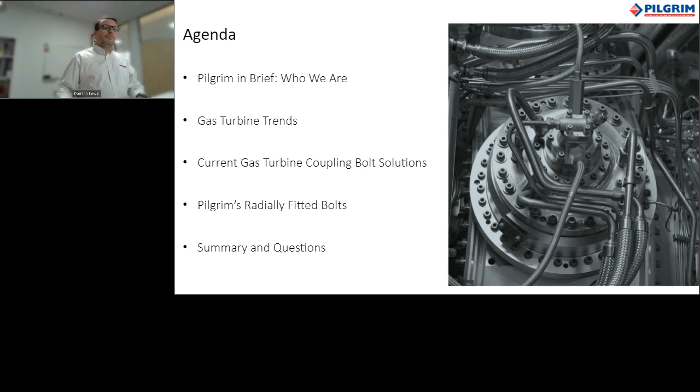So, who are Pilgrim International? I'll give you a brief insight into who we are. What do Pilgrim do? We are an engineering company with a vision to create a world of trouble-free connections, and we focus primarily on high-integrity joint fixings, whether that's static or rotating.

We have a number of technology platforms that support this: our boltings and positioning offer, which we'll talk about today, bolt tensioning systems, and hydraulic drive-up systems. We provide a number of services into the market, including training and on-site machining, and we also have a hydraulics pack offer to support the installation and use of the majority of our products.

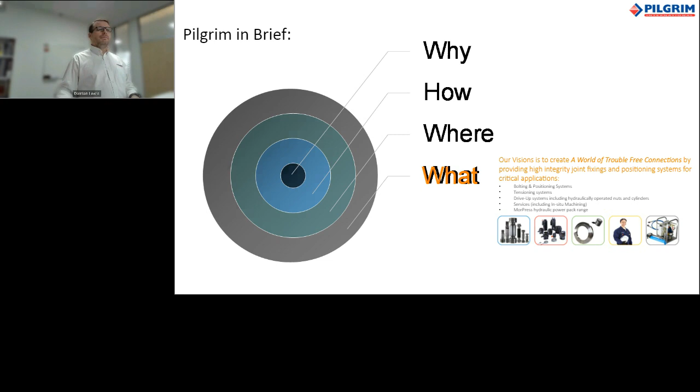We're a company based in the UK, with manufacturing in Sweden, and we sell to over 55 countries directly, over a large number of years. We also work through a number of agents and distributors, so we try to reach out to everybody in the marketplace.

How do we do it? We're a company with over 65 years in existence, and in that time we've gained a lot of experience through creating known friction into systems. We have strong experience of oil injection methods, and good knowledge of material expansion, which my colleague David will show you in the product we discuss later. We're also very experienced at working with high pressures, around about 2,300 bar, and we know how to seal mechanical systems using these high pressures. We couple that with a vast knowledge of key industries such as marine, or in this case, power generation, which we'll talk to you about today.

But why do we do it? We have a passion, and our passion is removing uncertainty for our clients. And what we mean by uncertainty is reducing unplanned costs. So we like to create systems and solutions that are predictable and reliable. And what that means is that it improves the operating income for our customers. And also, we like to try and improve the performance of our customers' assets as well.

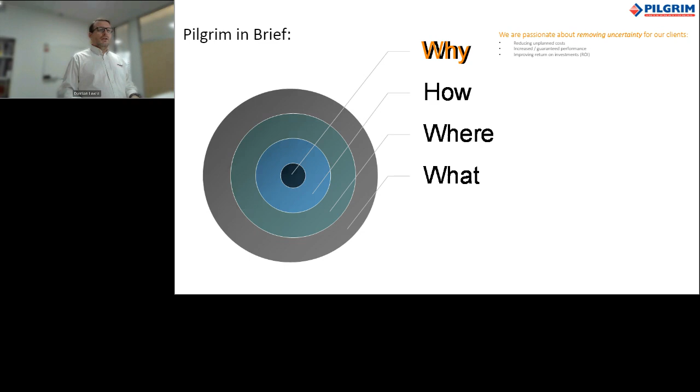So just want to highlight, here's some key customers or clients that we work with through different industries. And as you can see in the top section, we deal a lot with power generation, and whether that's the turbine OEM companies or whether that's the end users, the people who are actually using the equipment, we work with all areas of the business. And that really helps us gain a lot of knowledge and a lot of experience about how our product can positively impact our clients.

So now what I'd like to do, now that I've introduced Pilgrim, I'd like to just talk a little bit about how we see the trends in gas turbines. And if I start with the macro view, the larger picture on what's happening globally, what we can see is that there is a lot of focus on decarbonisation, and I don't think I need to go into too much detail about that. If you just watch the news, I think you can see there's a lot of that going on at the moment, and rightly so.

But what does that mean? We see that there's a lot of focus on transitioning from fossil fuels to renewable and reliable sources of power. What this means is that there is a transition away from coal generation. And I saw a phrase the other day that it will be ultimately outlawed. So through government activities, the use of coal will become less and less.

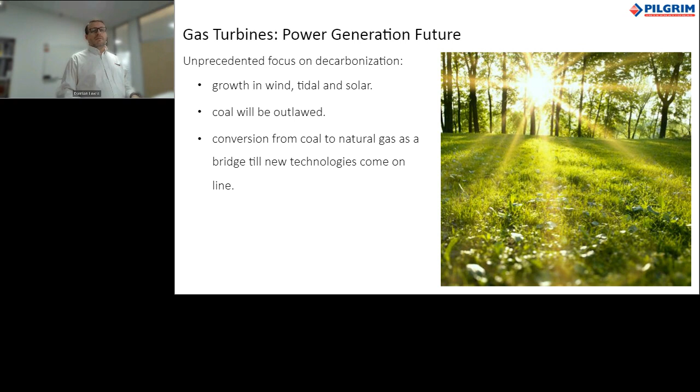So what that means is we see a lot of transition of power plants moving from coal and converting to combined cycle power plants, as an example, and the use of natural gas. And we see that will be a bridge until the new technologies that we're talking about, such as hydrogen, come on board.

And then we also see that there's a mixture of blending hydrogen and natural gases together. And that's a big activity for the turbine OEMs to come up with solutions on how to manage that transition of increasing the blend or the reliability on hydrogen and reducing the need for natural gas in the future.

And then we also observe that nuclear is making a comeback from the last 20 years of having some bad press. Now it's being reconsidered as a reliable source for energy again.

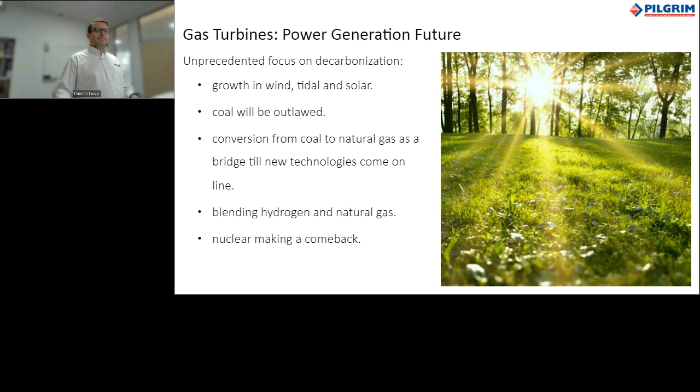So if we then look what that means specifically for the challenges of gas turbines, we see that the gas turbine business will maintain and increase over the next 10 years or so.

There are some aggressive targets for gas turbine development. So there's a lot of activity on how to improve. And where we see those are through efficiency improvements in the gas turbines, and I'll explain a little bit about that in some slides to come.

The compatibility with renewable energy sources and the pressure that will put on gas turbines is the ability to start up quickly and bridge the gaps where renewable energy sources can't meet. Maybe, for example, as a wind turbine, if there's no wind, we still need to have energy.

Obviously, a flavour of the month is CO2 emissions, the reduction of those to support the environmental impacts.

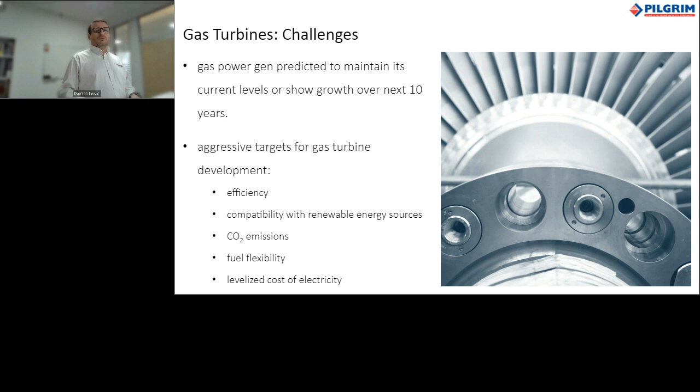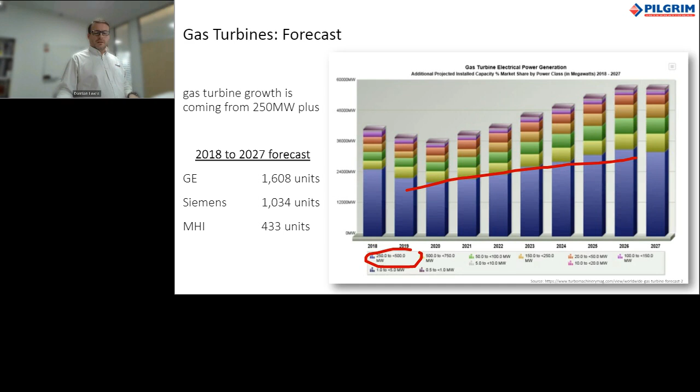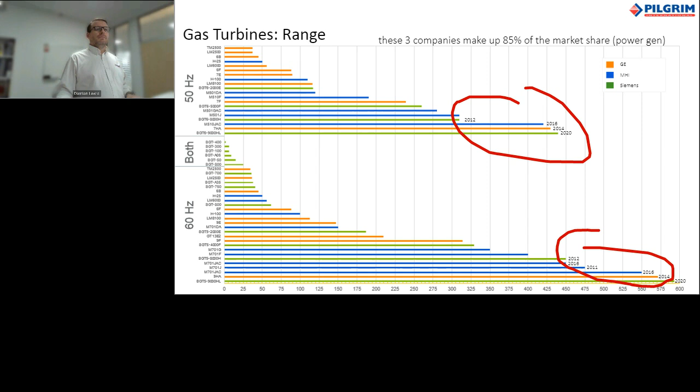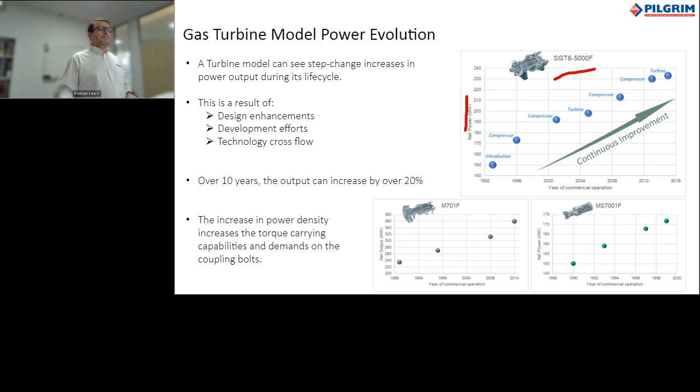So what I'd like to do now is just spend a few minutes to talk about the basics of coupling bolting. What is the basic activity of a coupling? Its functionality is basically to transmit torque. When you have a flanged coupling, you need to bolt it together. I'm going to explain two methods that we see in the marketplace that are quite common. You have friction-driven solutions, and basically they are a low-cost solution that are transmitting axial preload by clamping the two coupling halves together.

And through friction, that drives the torque through the system. The thing that we see here is that they create small transmissible torque. So they can only really be successfully used on smaller turbines.

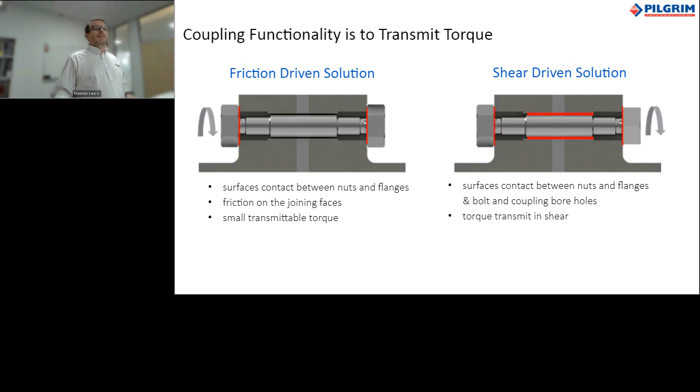What we then see is shear-driven solutions. The solution that we're showing you here is a combination of shear and friction, denoted by the red areas here. How that works is the torque transmission is actually transferred using contact area between the bolt and the couplings to drive the couplings, both through the diameter of the bolt connecting with the bore of the coupling, and also through the face of the nuts to the coupling as well, intentionally. Again, this seems like a really good solution. However, there's some issues that we can see, and I'll explain those as we go into the next slides.

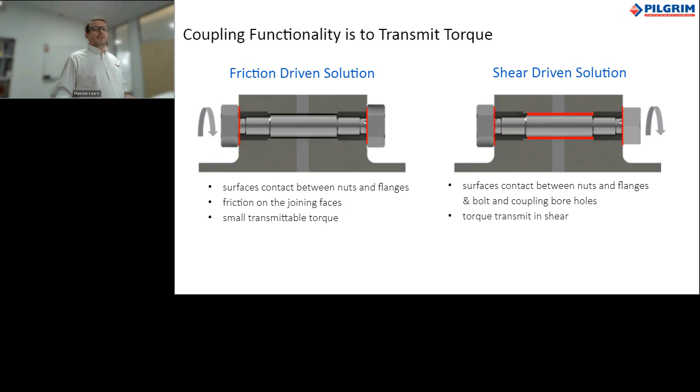So first of all, I'll talk a little bit about the friction solution. It's a low cost solution, and it's very common in the marketplace. The issue that we see is that it can create unplanned costs because the bolting solution can fail. What we mean by fail is that there can be stuck bolts. When the bolt is in situ and actually in operation, there can be some shock loads that are created, which means that there's some micro movements. Because there's clearance in the system, the bolt can get jarred and get stuck. With that comes some downsides of trying to remove the bolt and some additional costs. The other issue that we see is that each bolt in the coupling cannot be uniformly loaded. So there's some difference between each bolt.

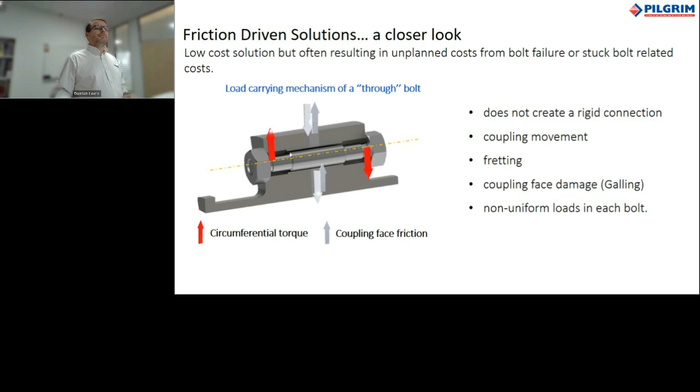If we then look at the shear solution, these are called fitted bolts, but in the main, they have some element of clearance to be able to assemble them into the hole, even if it's just a very small dimension. However, there is some clearance. And what we see as well is that when the bolt is actually tensioned, this also stretches the bolt. What that means is that the shank diameter of the bolt, which should be in contact with the coupling, can actually reduce in size slightly, creating an even bigger clearance between the coupling and the bolt itself. What that allows is for micro movements under dynamic loads, and then the bolt can actually angle itself and get stuck, creating a stuck bolt situation when trying to decouple. So we often see that there's a seized bolt situation with these solutions.

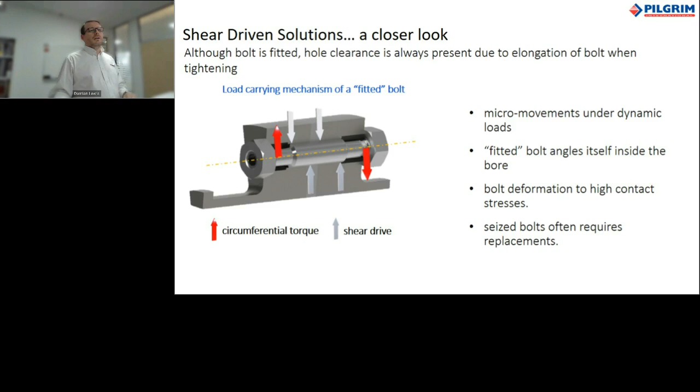So if that doesn't happen very often, is that really a problem? What we can see here from these pictures is that it can be quite catastrophic.

In the top left-hand corner, you can see a bore that has been damaged by micro movements, and the bore material has started to fleck away. In the second one, you can see some carburization where oil has got in and heated, and that's not very friendly towards the bolting solution and trying to remove the bolt. It actually sets like concrete.

When you're tensioning bolts or torquing bolts, you can see here that there's face damage on the third picture, creating damage on the coupling face. And if you do get an unfortunate situation where you have a bolt stuck, you can damage the bore trying to remove it. Here you can see some real clear damage to the bore diameter.

And if you do get stuck bolts, quite often you have to use methods, as you can see in pictures 5 and 6, where we're actually having to acetylene torch the bolt out to destroy it, to remove it. In the last picture, there is a specialist company that's been brought in to drill through the bolt to remove it. That means cost, but also replacement product as well, and all these have a major impact on safety. These are all activities that we don't want our operators to be doing when they're having to decouple.

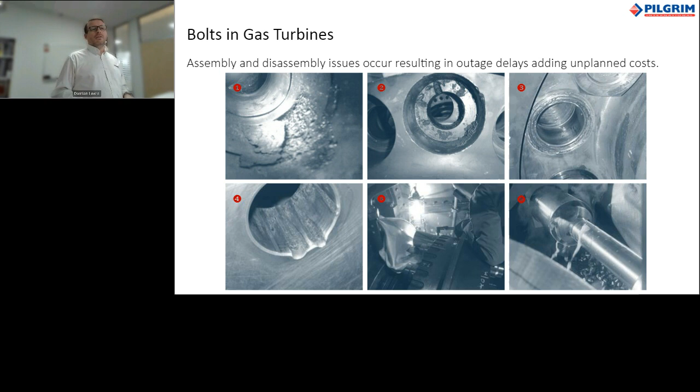So, as I said before, what if this happens infrequently? But in our experience of being in the power generation business for over 35 years, we don't see this as an irregular occurrence. We undertook a survey in 2020 and asked one very simple question to a user group of gas turbine users: how often do you experience seized coupling bolts when you're splitting a coupling during an outage? The feedback was quite alarming, but not surprising.

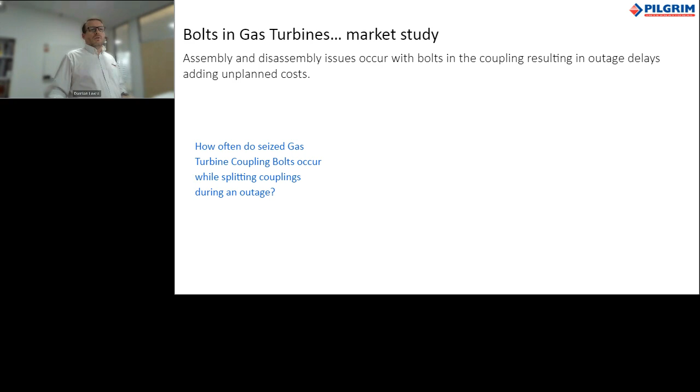We saw that 80% of people splitting couplings actually experienced some level of stuck bolt situation. And of that 80%, 37% experienced it very often. This is really why Pilgrim exists, because we want to solve this issue. We want a situation where our customers and clients don't experience stuck bolts, because we recognize some of the pain that this causes our customers.

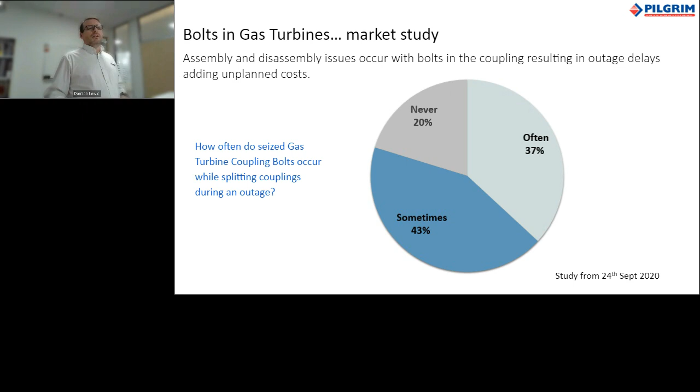So before we move on to a small quiz, I'd just like to give a conclusion on this and show you what we see as regular bolting solutions in the market today, or the types of bolting. I talked a little bit before about friction and shear driven solutions, and what we see is the classic torque tightened clearance bolt. To summarize, it transmits low frictional forces.

The coupling can create coupling damage, and this is very common. It doesn't retain its loads, or it's inaccurate, and we see that coupling slippage is quite common, especially when you hit some dynamic loads coming into the system.

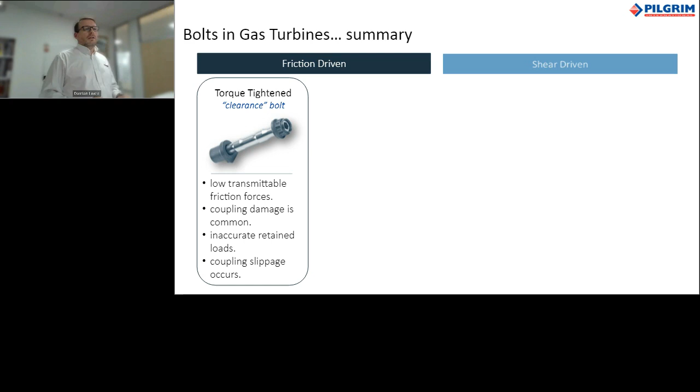So what we then see is that some companies have actually created a hydraulically driven friction bolt. And these need massive preloads. That means the solution is designed right to the end of the envelope of its operational ability, and it needs that to create the preloads.

But that comes with some risk, because you need quite a lot of safety equipment, which can be quite bulky and complex to manage. There's a puller, which I'll just highlight here. Because that is put under quite a lot of stress when it's used, there is a finite life and it needs replacing. There's a very low factor of safety, so if the system experiences some shock loads, the bolting can quite often get stuck.

So what we see is some people driving towards using shear bolts, because in theory, it's a better solution. We see what we call fitted bolts, and as I mentioned, these are normally not truly fitted. David will explain a little bit about what truly fitted means in his section.

But what we see is that when you have a hydraulically installed tension bolt, you can still get micro movements because of the clearance that's inherent in the system, as I mentioned before, the reducing shank diameter. This also creates coupling slippage, and the coupling bore and face can get damaged.

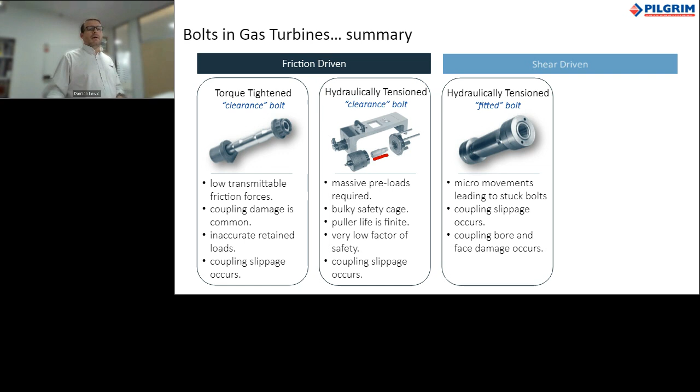And then finally, we see an option in the market called mechanically tensioned. This is the first introduction where you see a sleeve introduced into the system. This sleeve on the bolt is actually driven mechanically through a number of bolts that you can see in the end of the nut, which then drive a sleeve through a taper to create a fitted bolt. In theory, it's a good solution because it creates a fitted situation.

However, we see some issues with the design as well. The nuts can be a little bit bulky because there are quite a lot of mechanical parts, and these mechanical parts are subject to failure if there's an ingress of dirt. It can be quite time consuming, because if you imagine a coupling with 24 bolts, you have 24 times 16 bolts to tighten up, and this can be quite time consuming. There's also no alternative removal method, so if the mechanical method fails, you're then stuck with actually drilling the bolt out.

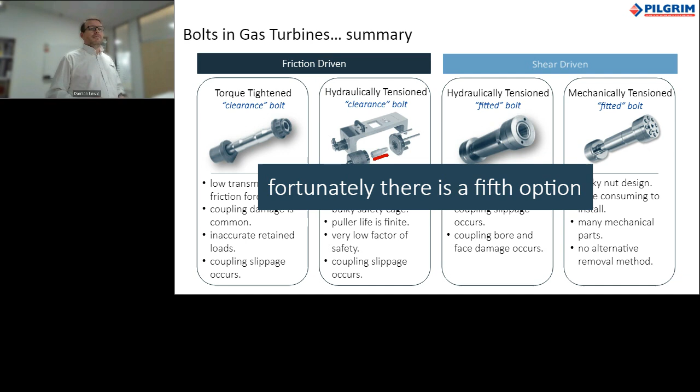So that concludes my section. What I'll do now is move on to a quick question. As I said before, if you could give some feedback, that would be great, before Dave talks about the fifth option that we have, in addition to the four options that we've shown here.

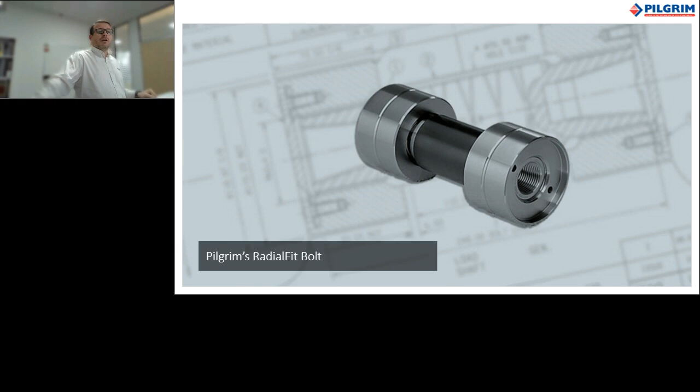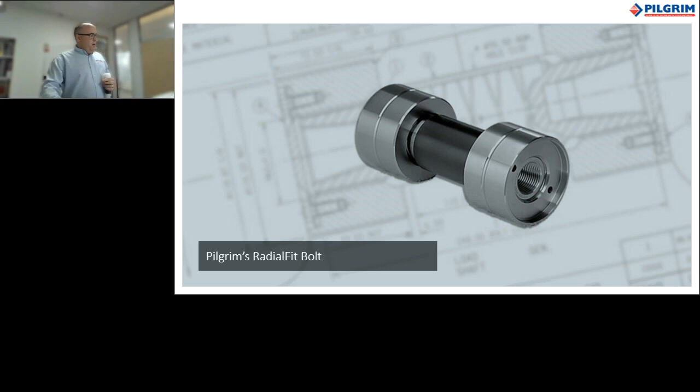Thank you, Damien. So, as Damien mentioned before the quiz, there is a fifth option.

Imagine a bolt that is OEM approved. It's retrofittable, repeatable, predictable, reusable. Due to its design, it has an extended product life. It allows accurate outage planning during the critical path stage. It offers a quick return on investment. A bolt that's really easy to install, but even easier to remove. And it eliminates any coupling damage, avoiding any costly redress of the application.

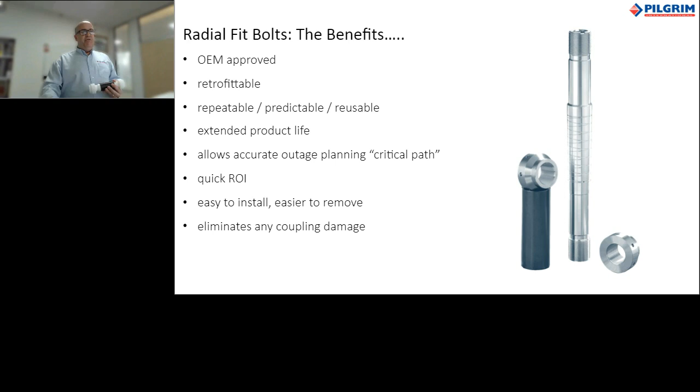So what is this bolt? This bolt is the Pilgrim Radial Fit Bolt, a true radial fitted bolt. And how does it work?

Like most bolts, it works with two nuts, a bolt and a sleeve, but this bolt is a little bit different. It has a male taper, and within the sleeve it has a female taper, which corresponds with each other. The bolt is designed to deliver the torque required for the application in both shear and friction combined.

The bolt will carry the torque of the application mainly through shear, with a very small percentage through friction.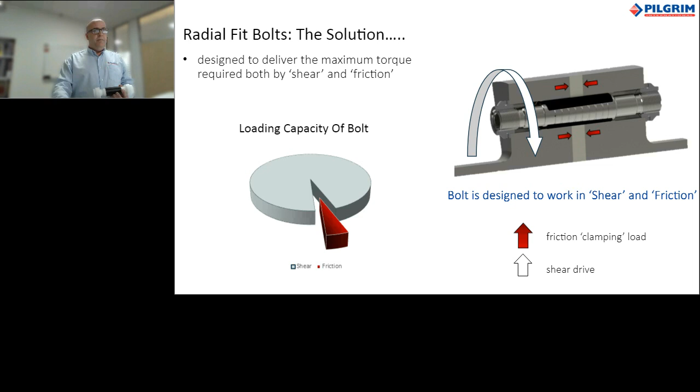So what really is the true benefit of this bolt? We can see here a great example of a 70mm diameter bolt with 16 bolts in the coupling. We like to define two zones: a safe zone where no slippage occurs between the flanges, and a slip zone where slippage occurs. And when we talk about slip of the application, we talk about stuck bolts, because that's where it's likely to happen.

This is something Pilgrim wants to avoid. So we see a clamp bolt, a friction-only bolt, a traditional bolt as we would call it, sitting just above the safe zone.

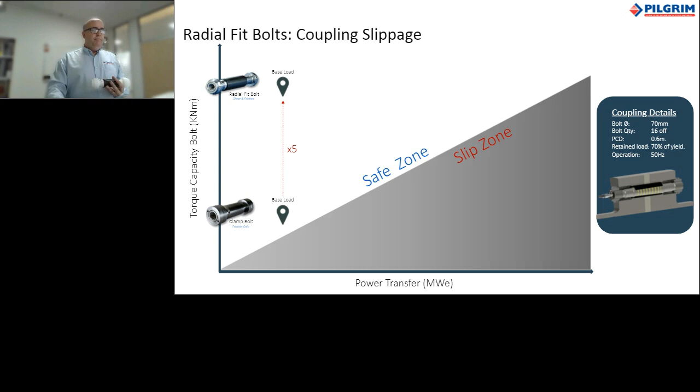Above that we see the Radial Fit Bolt, which offers a bigger capacity, around 5 times bigger than the base load a traditional bolt can offer. So as the power starts to increase, the torque capacity increases also. It's very clear in this example that the clamp bolt, the friction-only bolt, starts to slip as the power increases, where a Radial Fit bolt just carries on to around 6 times the base load. That's not just for operational torques, it also takes into consideration any shock or out of phase torques that can occur during operation.

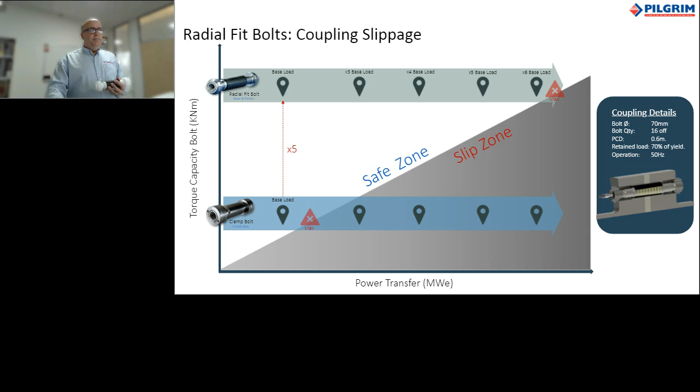So quite simply, how does this bolt work? Like I mentioned earlier, we have a Radial Fit bolt with a male taper and a sleeve with a female taper, which corresponds to each other. The bolt is inserted in a clearance condition. When we start to control expansion of the taper sleeve using hydraulic equipment, we slowly position the sleeve within the coupling and pull the bolt through the sleeve. As we draw the bolt through the sleeve, it creates an expansion, and it's that expansion that gives an interference fit. Again, a truly fitted bolt.

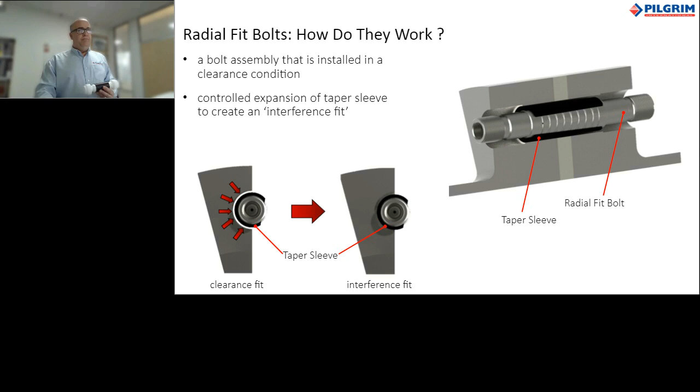So we talked about not only does the bolt work through shear, the bolt also works through friction. We do this by using hydraulic tooling to create a controlled stretch of the bolt to put a load into the system. This high clamping load not only ensures that the coupling faces come together and create additional torque to the system, but it also locks the round nut into place. It's that high load that stops the nut from coming loose during operation, so no need for any anti-rotation devices, something you can see on quite a lot of conventional bolting systems.

Because everything is hydraulically controlled in a safe manner, there is no coupling damage. So again, no costs to redress the coupling, which not only costs time and money, but also means getting expensive equipment onto site to redress that damage. All in all, it takes less than 15 minutes to install and remove the bolt.

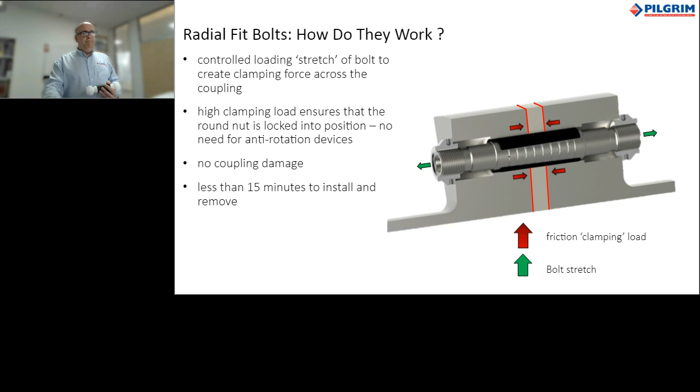So we talk about how easy it is to install. The true magic really happens when we remove the bolt, and we do this in a number of ways. We have a specially coated sleeve to aid removal. We then apply high pressure oil between the bolt's tapered surface and the sleeve's internal tapered surface. With that, the bolt will remove very quickly, and I'll show you a video a little later of that process. But if that process was not successful, we designed a fail-safe with a secondary method to remove the bolt in a safe manner. With all stages of removal, we ensure there's no damage to the coupling nor the product, and again, very quick to remove, taking less than 15 minutes per bolt.

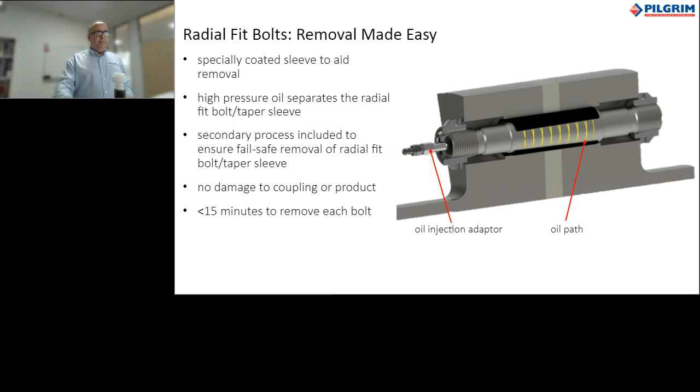So here, like I said earlier, I'd like to show you a quick video of how quick, using the oil injection method, the bolt comes free from the system.

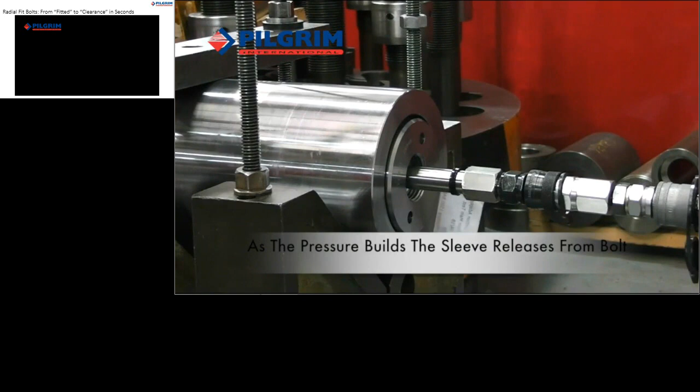As you can quite evidently see there, very, very quick and easy to remove a bolt. I think we can all say that it's a lot easier and a lot better than trying to remove a seized bolt in the coupling. The frustration and time that causes, we remove that uncertainty.

Pilgrim, during the design phase and during production phase, we value your safety. One thing we try to do is ensure the bolting system we propose requires no heat or freezing. It's a simple operation, as we've seen for installing and removing. It's designed to be handled by one person, so safe handling, keeping weights down to a minimum, enabling one person to install and remove the product. We have optimized puller design and material, and there are no safety features required, I'll go a little into that later.

The hydraulic vessels which we supply to deliver the hydraulic power to the system are all CE, UKCA marked. With the simplicity in removal, there's no need for cutting equipment, which again can cause a lot of issues with health and safety, and also getting permission to get that equipment onto site.

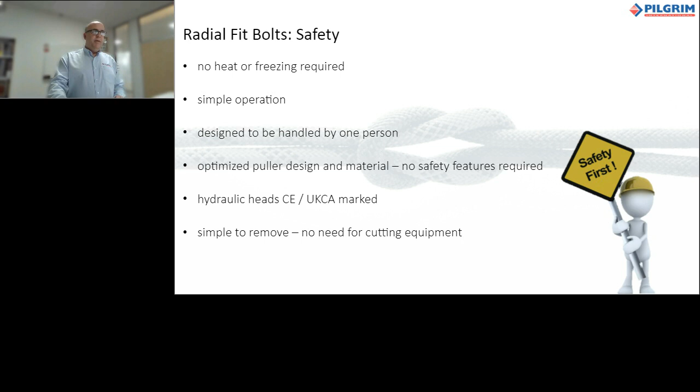So why Pilgrim? We have a proven history. Yeah, we have been manufacturing coupling bolts for 35 years of our 65-year history.

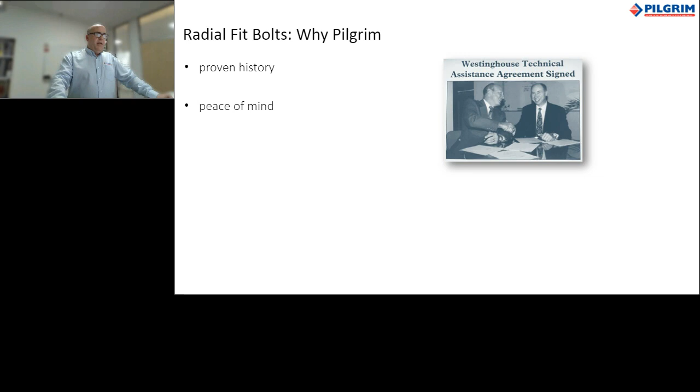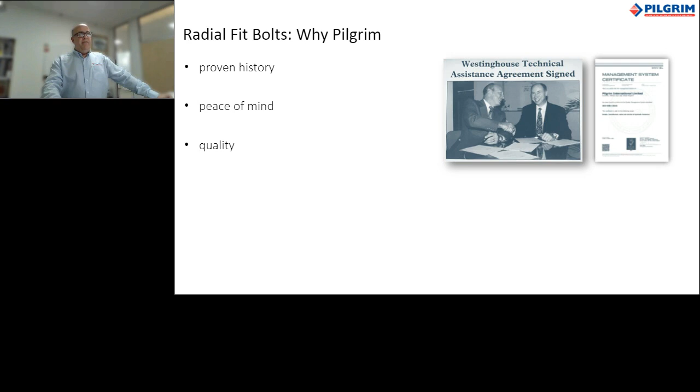We offer peace of mind. We've got our bolts in roughly 500 power plants worldwide, and this roughly equates to around 25,000 bolts. And it's those bolts we have 0 reported design defects. So we're very, very confident, not just with our product performance, but also our quality.

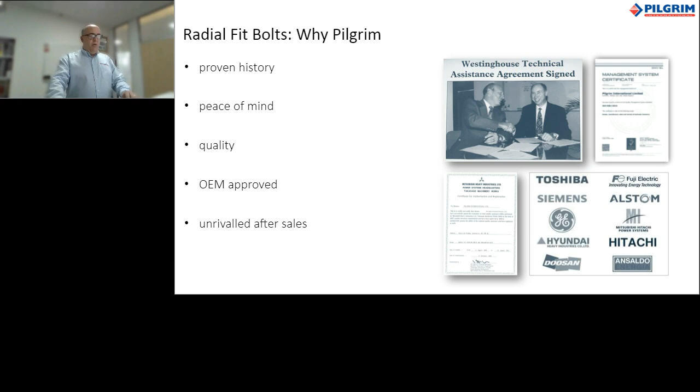As Damien mentioned earlier in the presentation, we work with a lot of the OEMs, and they approve our product to be worked on their turbines. We have unrivaled after-sales, whether that's technical support or field support. Pilgrim are always on hand to support the customer.

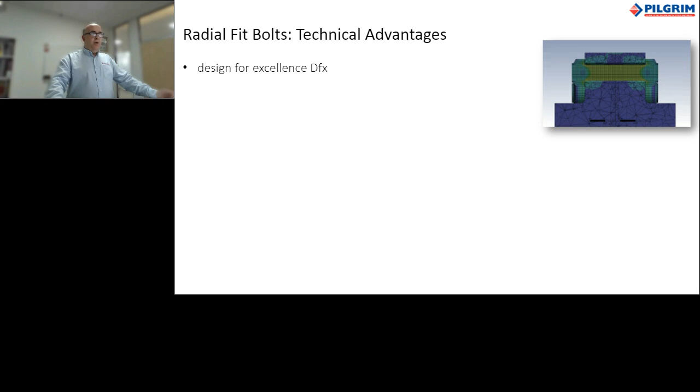So the technical advantage of our Radial Fit Bolt is that we have design for excellence. What I mean by that is we utilize the latest 3D modelling software and fuse that with the latest finite element analysis technology to ensure that whatever we design is the best solution for your application. We have a unique puller design, whether that's the geometry we've optimized over the years, the material selection, or the thread geometry.

We ensure a puller which is safe to use, with no need for a safety device. We've had zero reports of any defects with our pullers.

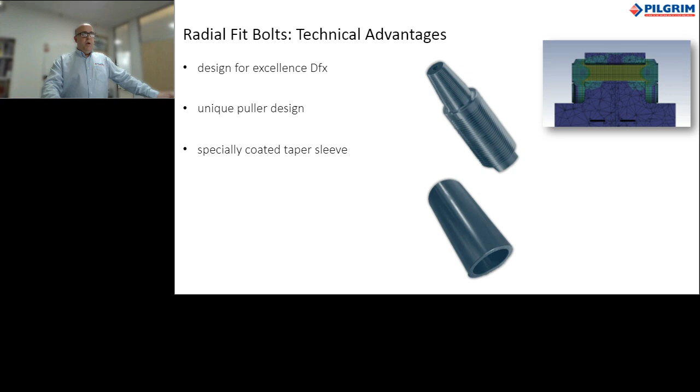We have a specially coated sleeve, a double helical groove, and an oil injection adapter which has a hardened lens ring attached to it to ensure a full sealing system against the bolt. Combine all three of those special features into our product, and that aids the removal. We have a simple but effective removal system for the bolts, because we realize that's where a lot of headaches come for users when they come to remove the product.

And finally, with all bolting, we only use the best approved mills for our material, which allows us to have full material traceability through the system. So we can ensure that the product that lands at the power station, power plant or utility is more than fit for the job.

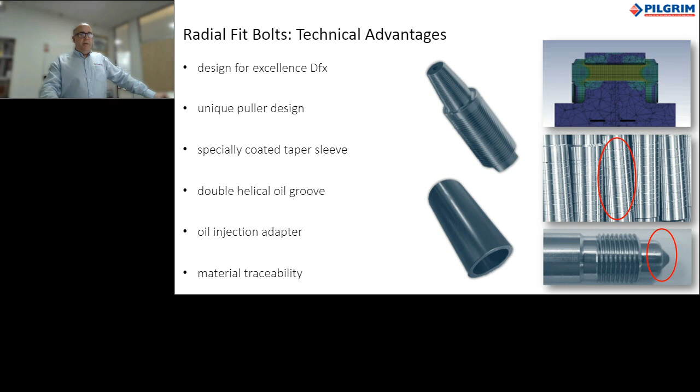So I've got a question here. I've got three power plants: Kaiga generating station in India, Heysham 2 power plant in the UK, and Pickering Unit 7 in Canada. What connects these three power plants together?

Well, the answer is that at one point, they have all held the world record for continuous operations, with Kaiga generating plant being the current world record holder with 962 days.

They also have another connection, and that connection to Pilgrim is vital. They are all equipped with Pilgrim Radial Fit Bolts, and we are proud that on all occasions when these units have been taken offline for necessary maintenance, all Pilgrim bolts were removed and reinstalled without any reported problems. Time delays were avoided, and the coupling got back online and generating electricity in such a short space of time, all in perfect working condition.

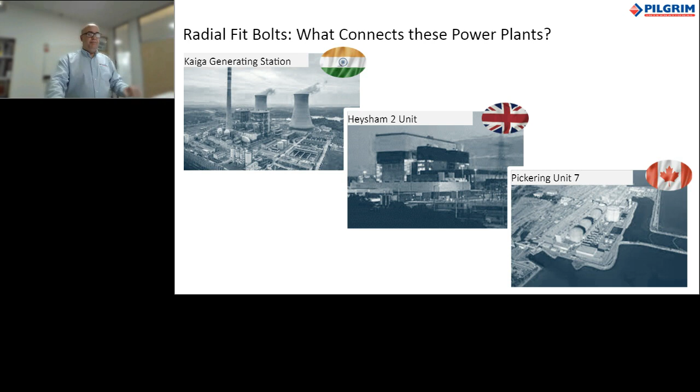So, like Damien said right at the beginning of my presentation, or I think it was Ivan, I've been at Pilgrim for 25 years.

I believe in the product, but don't just take my word for it. Have a quick read of some of our customer testimonials from two power plants who've been utilising our product for a number of years.

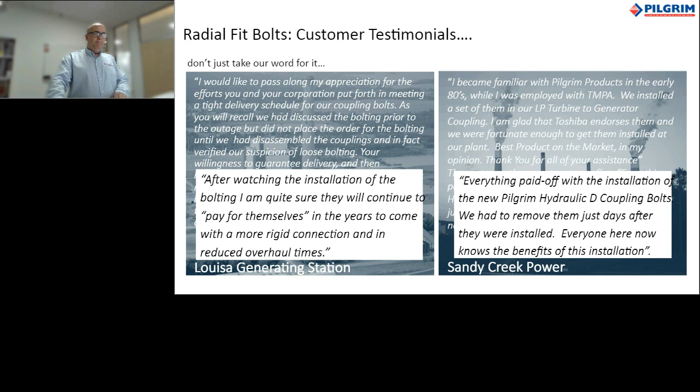So the bolting system, we like to say it's designed for life, and we design based on our field experience. What I mean by that is that Pilgrim is a listening company. We listen to our customers, we value feedback.

Myself and our expanded service team have been fortunate to travel to many of the power plants that have got our product installed. Working very closely with the operators of the equipment, we sit down and take feedback. We take that valuable information and put it back to the design team here at Pilgrim, and we continually evolve the product so we can take this product into the next generation by making incremental improvements all the time. We just do not sit back and keep the product as it is. We're continually evolving.

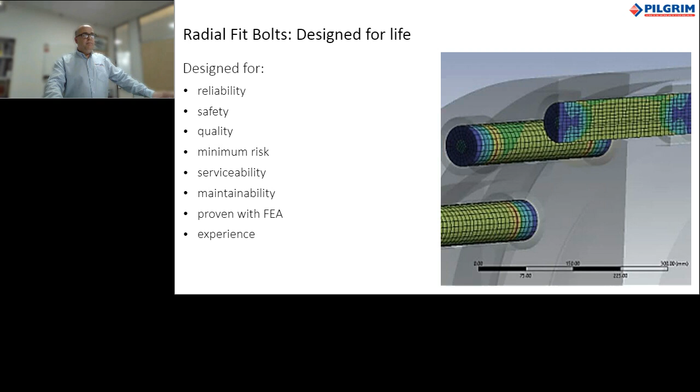So I'd like to end this presentation a little bit with a quick quiz. I'd like to ask a question with a number of multiple choice answers. Please spend a couple of seconds choosing your answer and then lock it in with the submit button.

Question 1: which power plant has a world record for continuous operation? Kaiga generating station in India, Watts Bar in the USA, or Maanshan power plant in Taiwan? I'll give you about 20 seconds before locking your answer in.

So that's what I would expect. Yes, you're correct with Kaiga generating station in India, and we're very proud that that holds a world record with 962 days in continuous operation with Pilgrim Radial Fit Bolts.

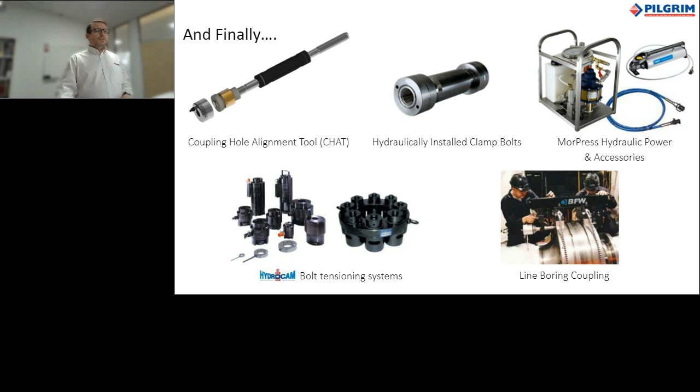We have a coupling hole alignment tool, or a CHAT tool as we call it, for being able to quickly align couplings and help with coupling closure. We also have hydraulically installed clamp bolts that can work in combination with the radially fitted bolt in certain applications. As I mentioned previously, we also have hydraulic power packs to support the installation of all our hydraulically installed products. We also have bolt tensioning equipment under the Hydrocam brand, for applications such as case closure systems. And we also offer a wide variety of services, including in situ line boring or coupling machining, with a sister company called BFW.